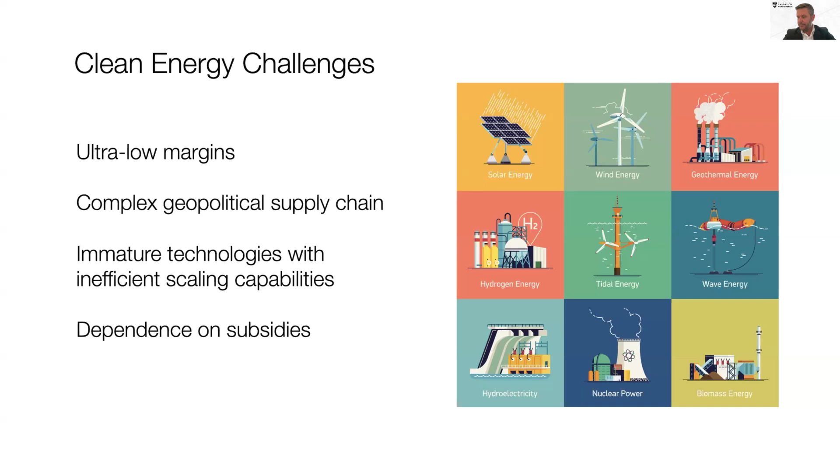I guess you kind of sit back and go, well, why bother? It seems really difficult. It's ultra low margin projects. You got high amounts of risk, high amounts of complexity. There's no market in place. So, really, why are we doing it? Well, I guess the energy transition has to happen. It's going to happen, and it's just about how do you get there. So, when we looked at this paper, it was, we need to come up with a new delivery system.

We need to come up with a new way of thinking if we're actually going to be able to build clean energy solutions that actually make sense and are competitive in the energy mix. So what's the transformation that we're talking about? It's really coming down to combining first principles thinking with project production management.

And when you think about first principles thinking, like I say, there's lots of bias, there's lots of constraints, there's lots of "this is the way it's always been done." But what I'd learned over the last few years was that that thinking isn't going to give us the right answer. It'll be incremental little steps towards something, but ultimately it's going to continue to be very expensive.

And when you look at the cost of green hydrogen versus fossil fuel hydrogen, it's about $1.50 per kilo for fossil fuel hydrogen. It's about $8 to $10 a kilo for green hydrogen. So you need something radically different if you're actually going to be able to come up with a competitive solution.

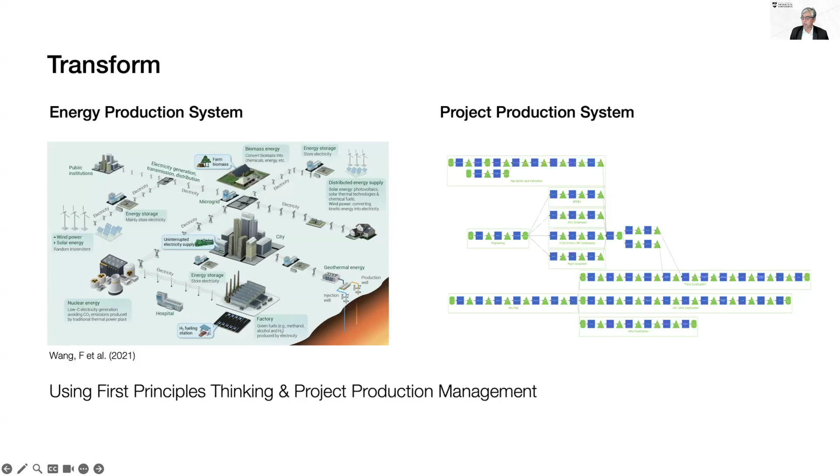So we see many times, working with project delivery teams, they say, we are working on really efficiently building a wrong project. Right? So therefore, it is not only important to understand project production systems, but also the actual production system in which the energy is going to get created when we're looking at these new clean energy solutions.

So I'm not going to go over this concept again. Keith has already talked about the benefits of having first principles thinking. And Todd and Roberto and Lon have already talked about project production management. So again, the core concept: looking at a project as a production system and applying operations science, fit for purpose digital and autonomous technologies, with sufficient benefits that have proven that there is something here.

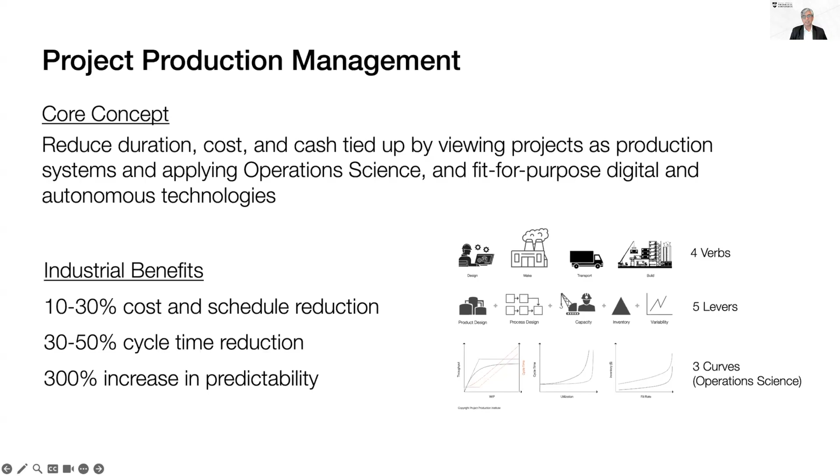Now, one thing that's really interesting is a lot of people through the Project Production Institute know that this type of thinking applies to projects. However, the PPM OS is applicable to any production system, whether that's pure manufacturing systems like continuous flow, line flow, batch flow, job shop, supply chain, or engineering, fabrication, logistics, on-site installation, and commissioning. Now, how can we say that? Because it's not something that is only theoretically possible, but something that has been applied and has delivered substantial results.

So let me take one example, just one sector called data centers, which probably is where the majority of the capital is being spent right now. One, we worked on the lead time reduction for hard disk manufacturing. Two, inventory optimization for data centers, including hard disks and other equipment that go in for the operation of that data center. Three, lead time reduction for fabrication of electric modules. Four, capacity analysis of the supplier for the electrical modules.

Five, synchronization of equipment fabrication, delivery, and installation with the building of the data centers. Six, predictability and schedule optimization for engineering, procurement, construction and commissioning of data centers. And last but not least, resource optimization of the owner-operators that are going to be leasing many data centers around the globe. So as you can see, for just one vertical, this type of thinking applies to any type of production system.

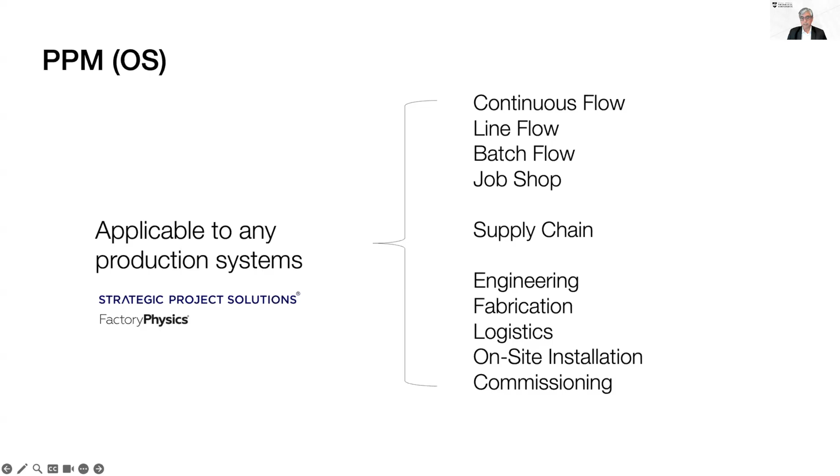Okay. So by combining the two approaches, first principles thinking with PPM, what we're able to say is first principles thinking brings a structured approach to remove biases, come up with original solutions, and assist with better decision making. Whereas project production management / operations science brings the framework to describe behaviors of production systems and the variables that drive those behaviors, right?

Because how we simply describe the behaviors and what variables we use to describe those behaviors is very important. Second, a methodology to qualitatively and quantitatively analyze trade-offs between these design decisions. Again, it could be the actual energy production system or project production system. And third, as Todd already talked about, an approach for controlling the production system to achieve the desired behavior.

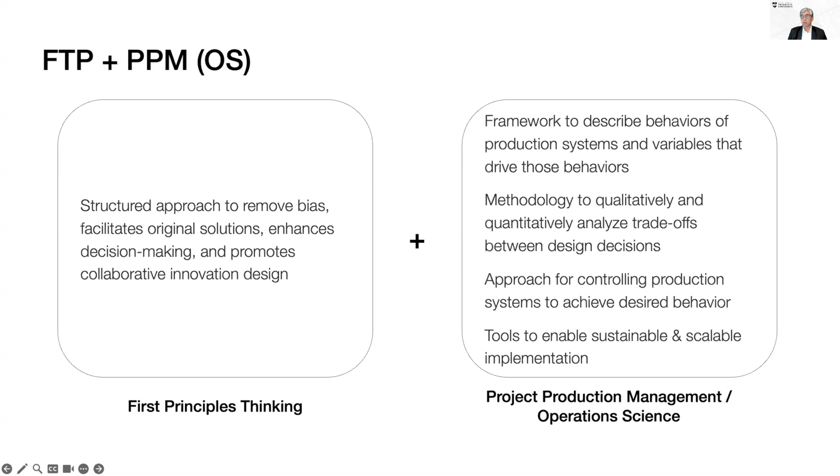And number four, most importantly, these are not just concepts and ideas, but there are tools to enable sustainable and scalable implementation. So bringing those together could be applied to any type of environment. But what we're going to do now is Keith is going to take this and apply it to green hydrogen. Keith? Yeah, thanks, James.

So I think it's important to start with, what are some of the fundamentals of hydrogen? Gray hydrogen is what's been used for decades. That's generation of hydrogen from fossil fuels, natural gas, and CO2 is emitted. As we go into the energy transition, blue hydrogen and green hydrogen were two of the colors that were added. Blue is using natural gas, but you're capturing the CO2 and storing it in aquifers, underground caverns, etc.

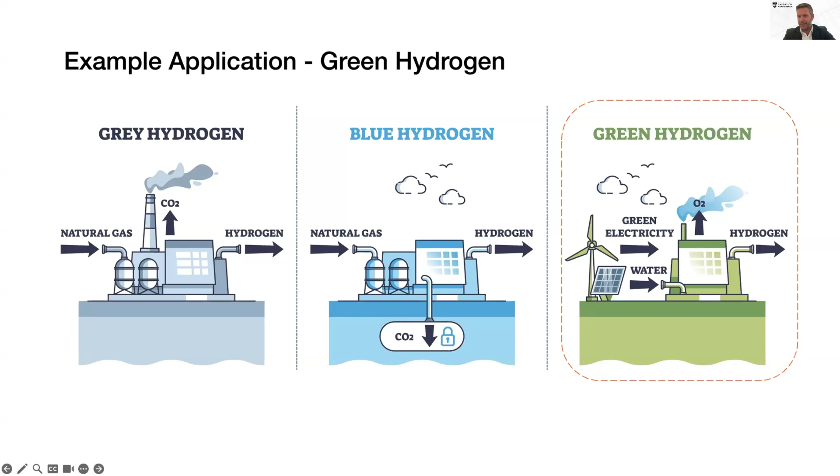So that's carbon neutral. And then green hydrogen, which was the area I was working in, specifically uses renewable clean energy with water, using electrolysis, to split the hydrogen and oxygen apart. You capture the hydrogen and oxygen, and there's an awful lot of heat generated, which tends to be vented and not captured. So we will focus on green hydrogen. So what are some of the challenges of green hydrogen?

The first bit to understand is the levelized cost of hydrogen, or the cost per kilogram. Gray hydrogen is about $1.50 a kilo. Green is somewhere between $8 and $10 a kilo. If you look at subsidies, like the Inflation Reduction Act, you can get up to a $3 a kilo subsidy on green hydrogen, but that still doesn't close the gap. Some governments are looking at carbon taxing for grey versus green, but either way, it still remains expensive and uncompetitive.

So who's going to pay the premium? Should people be paying the premium, or should we be looking at different solutions to drive that cost down and get it close to, if not on parity with, grey? They are also commercially complex. As I mentioned, subsidies are difficult. You're spanning multiple political cycles just for the duration of the projects, which means your subsidies have the potential to change. So not being reliant on subsidies in order to be profitable is really important.

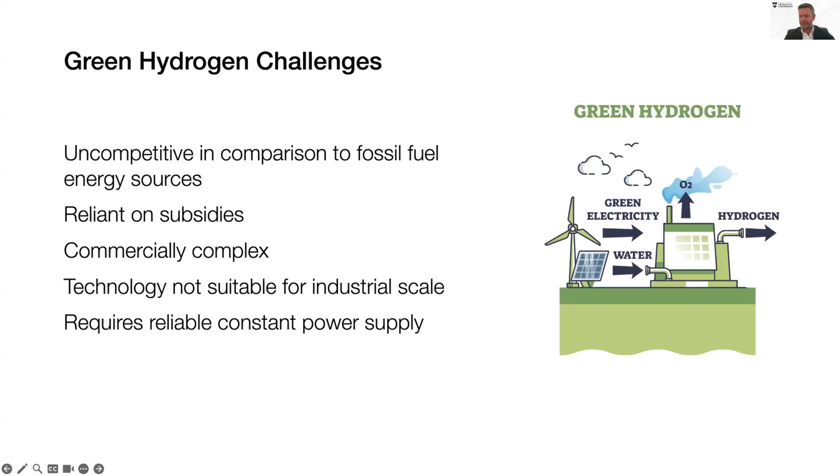And lastly, efficiency. As I mentioned, an awful lot of heat is produced during electrolysis. Electrolyzers are about 60% efficient. Efficiency is king in this. Over 50% of your cost is in electricity, and when you're losing roughly 40% on heat and byproducts, you're losing an awful lot of value, and you're not able to do anything with that. But when you look at the fundamental truths of green hydrogen, the energy has to be carbon free.

Now that can be wind, solar, nuclear, hydro, geothermal, doesn't matter, as long as it's carbon-free energy. You then have to have a transmission system to take the electricity from where it's being generated to where the plant is. These plants tend to be close to the consumers because hydrogen is quite difficult to move. So you have to have that transmission system in place. And it's kind of well known that the transmission systems in many of the countries probably aren't suitable for the additional capacity that needs to be added on.

The electrolysis, say it's about 60% efficient. There are some companies that are working to try and increase efficiency up into the 80%. But is that good enough? Or do we need to continue to push the boundaries on that? Electrolysis itself has to have very clean deionized water. So water is your feedstock. Again, depending on where you're doing it, water can be a restriction just due to availability. So that's an important bit to look at.

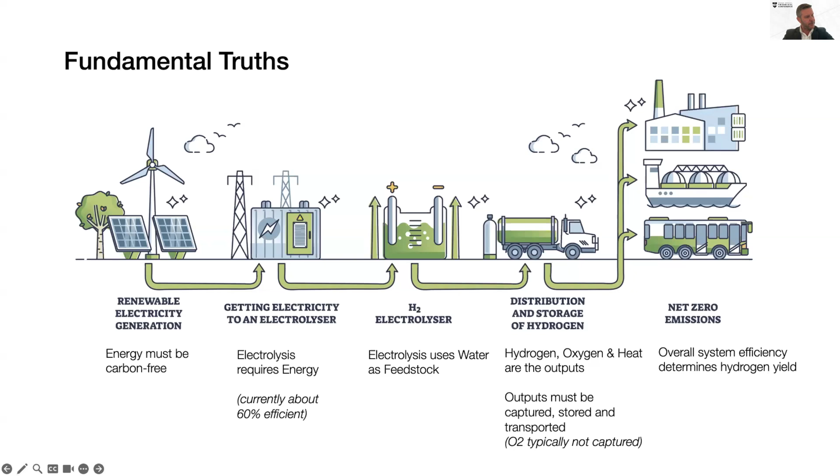Yeah, so what we have done is take the diagram that you saw and turn it into a production system map that starts from your electricity sources and water sources. And as Keith just talked about, there is the process to generate electricity, transform electricity, and transmit the electricity to the electrolysis, and then you have the water. Again, the water has to be treated and transported, and then it gets through the electrolysis, it gets separated, and then heat is also created, and heat cannot be stored on its own. So it has to be captured into a medium, whether it's air or liquid, and then that has to be transported and consumed. The same thing has to be done for the O2 and H2. It has to be captured and transported to the various consumers that Keith already talked about.

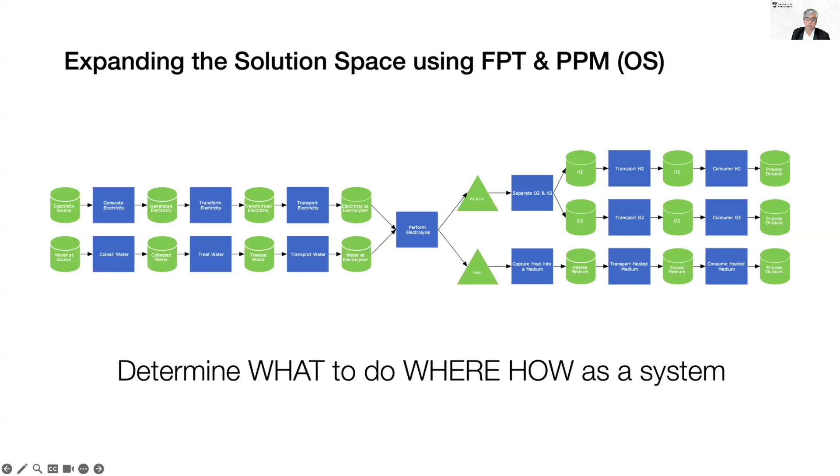And what's interesting is this is the same concept and discussion that we've been having this morning. How do we determine what to do where and how, and optimize the overall system, right? So again, the concepts that Todd talked about, production system optimization, production control, and CAPE, all start to come into play when we're looking at the overall optimization. And as Keith said, just optimizing a single portion or side of the approach is not working. Okay, so once that is done, you have to figure out how you're going to deploy this.

Again, these technologies are not meant to be a single project and forgotten. So the question becomes whether this is any type of project that is going to get deployed. A lot of people think, and we talked about this in past conferences, that once we have this manufacturing approach adopted, it will somehow automatically get deployed. But what we're finding is that's not true. The reality is a little bit more complicated because the demand and local requirements and conditions of each site require configure-to-order installation. So not only do the solutions have to get somewhat standardized in order to increase efficiency, but they must have the ability to be configured so that they are adaptable for any type of environment that you wish to put them into.

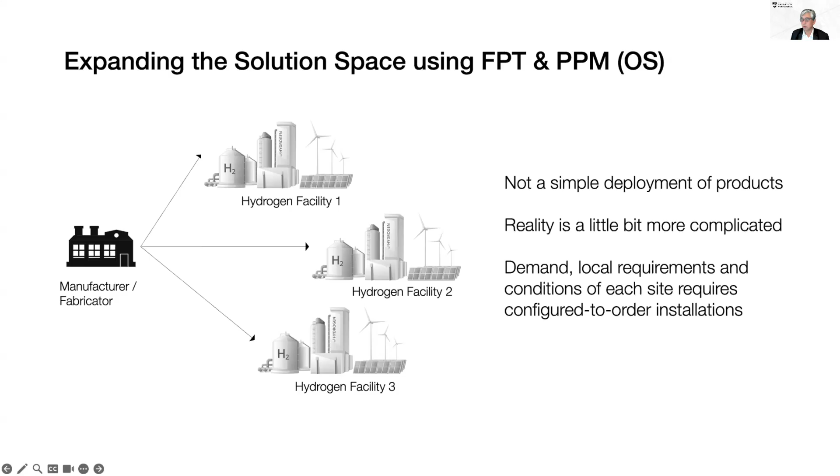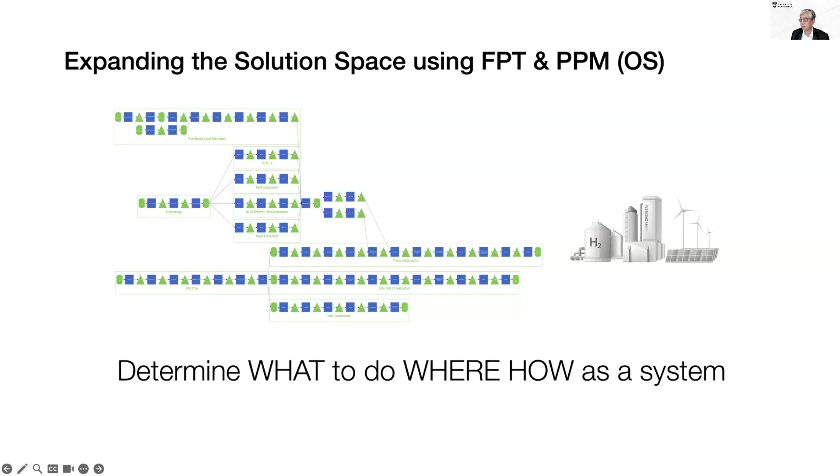So that now brings the production system where the output might be a facility. Again, as Keith said, all the icons shown on the right may be in various different locations. So what to do where and how as a system comes into play when we're working on the production system for energy, as well as the production system for the facility itself. Okay, Keith? Yeah. So when you start looking at clean energy, and like I say, these projects are complex, they span over multiple years. But when you talk about clean energy, most people default to solar and wind.

But there's lots of different types of clean energy out there. And when you think about solar and wind as the typical go-tos for clean energy, they're inefficient and they're intermittent. And if you want to optimize the output of a green hydrogen facility, it needs 24-hour reliable, dispatchable power available, because that's how the electrolyzers work at their optimum level. When you're dealing with something that's 60% efficient to start with, you don't want to degrade that further because you're going to be leaking lots of value.

So you really then start coming down to how do you make clean energy a 24-hour dispatchable, reliable energy source? Because at the minute it's not. And it's not without adding in batteries, right? But when you start looking at battery energy systems, most people think about lithium-ion batteries. So these projects need solutions, and when you look at the cost of hydrogen, you have to get rid of rare earth metals, you have to increase the efficiency of these things, and you have to have energy which is competitive.

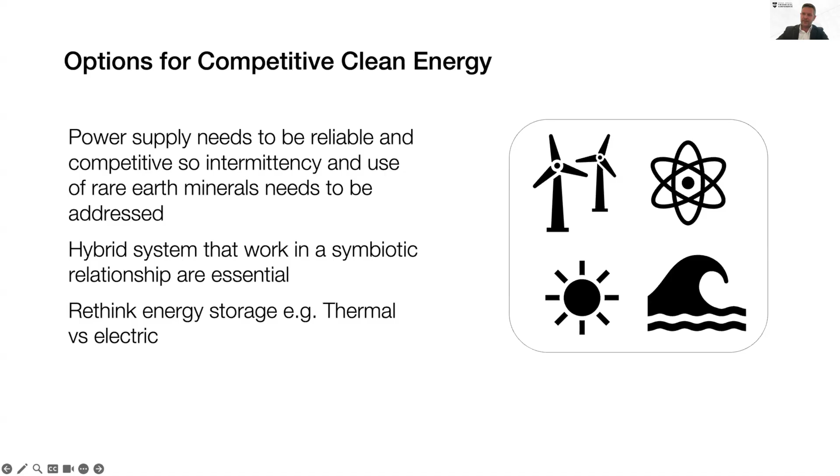But moving on from that, there's a big what if for me. Current thinking would suggest green hydrogen, green ammonia must be done onshore, right? It's got to be onshore because that's kind of what the technology states. But why? Let's challenge why it should be onshore. Can you take green hydrogen, green ammonia, and put it offshore and put it subsea? Now, I've had this conversation with a few people, and most have laughed at me when I've said this, because they went, "That's crazy. Why are you thinking about that?"

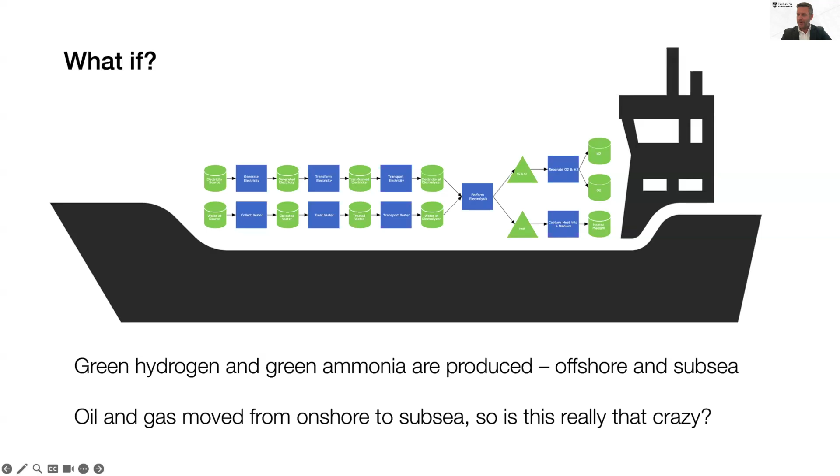But really, when you cast your mind back, oil and gas started in the desert. But when you look at the evolution of oil and gas, it moved offshore, it went subsea, and that was to access better acreage, better fields, and open up different frontiers. So why can green hydrogen and green ammonia not follow a similar path? So let's look at the offshore and subsea piece in a bit more detail. Some of the big issues that green hydrogen has.

If you're going to store it, you're storing it at high pressure. Essentially, the big concern is explosion risk once you start dealing with high pressure hydrogen. So that then starts dictating on land. It can't be near communities. It's got to be out of the way. So that starts limiting where you're at.

When you then start thinking about solar, wind, clean energy, you don't tend to find the most natural and optimized places for those right beside where you want to actually have your production facility. So like I say, that starts bringing in large transmission networks and systems, adding more complexity, more expense in there.

I've mentioned the heat. There's lots of heat produced. So when you're on land, that means you really need to start building big complex cooling systems in order to deal with the heat. You have to have the electrolyzers inside buildings, right? The buildings have to be explosion proof. They have to have lots of fire and gas sensors, etc. Those buildings are expensive, right? And the more units you have, the more buildings you're going to need.

So when you start looking at the issues that are sitting in front of you, does offshore and does subsea start helping actually eliminate some of those issues? Well, yeah, if you go offshore, you don't have to worry about the public, because there's nobody there. When you start putting the electrolyzers subsea, and the production of the hydrogen and storage of compressed hydrogen subsea, you don't have explosion risks. The seabed temperature is naturally about 4 degrees C. So you've got a natural heat sink around it. So you don't need cooling. You don't need buildings because you don't have the explosion

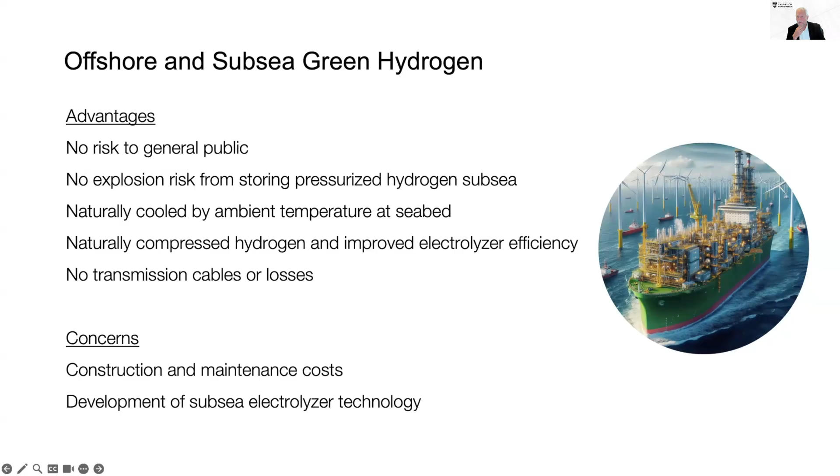Hey guys, are you about at the end here? Yep, we're about at our time. Okay. All right. So hit your conclusions and then we'll wrap it up. Yeah. All right. Sounds good.

So again, this is a technical conference. Has this been systematically applied together? No, but we believe that there is opportunity to actually do so, where one provides a structured approach to question the existing assumptions, and operations science and project production management can enable the purpose-built delivery models. And when it's applied to a clean energy solution, it actually has to be self-sustaining without subsidies.

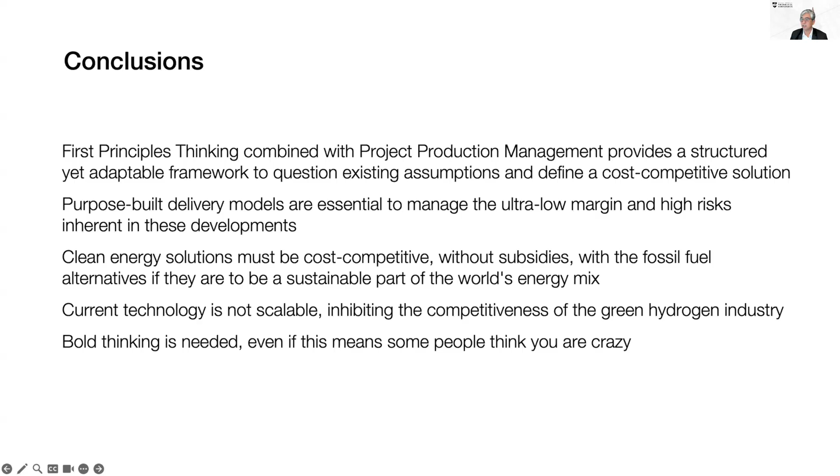And while the current technology is not scalable, we believe that innovative thinking can actually bring some solutions that can meet these challenges. Sometimes bold thinking is needed, even if some people think you're crazy. As they say, it's the crazies that change the world. So the next step for us is to identify a project where this approach can be fully implemented. Again, it doesn't actually have to be a clean energy project, and then document it for a case study. So the request out there is, anyone interested? All right. So if you've got an interest, reach out to one of these guys and let's get the ball

rolling. I think you laid out a really powerful case for a different approach of first principles thinking connected with production management, production engineering. Excellent, thought-provoking. I can only imagine how some of your ideas were received within your former employer when you floated some of those novel concepts out there. Given my past experience, I can only just imagine. So thank you guys very much for your thoughts and your contribution today.